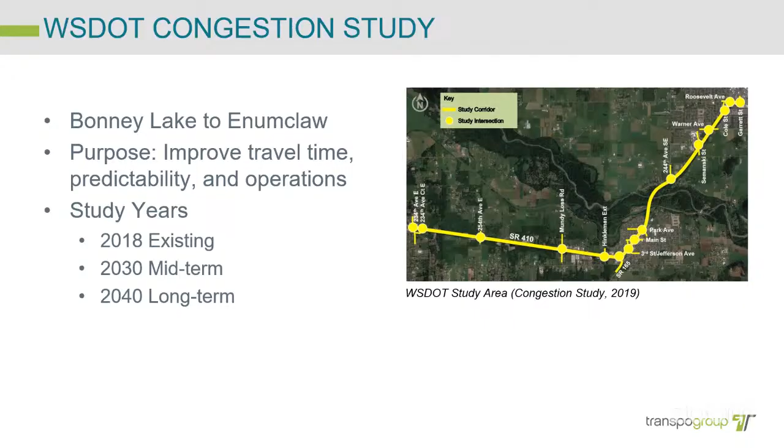And then usually with anything kind of traffic related, we do a 20-year forecast. So they rounded up and did 2040 for the long-term forecast. And then they also had a 2030 that they called a midterm forecast. Let's go to the next slide.

So jumping ahead to what their conclusions from that study was, and they called these midterm strategies. So they said by 2030, this is what the corridor is going to need for improvements. And they considered it basically like priority, like the first thing that they would do.

WSDOT recommended first that Park Avenue would be converted from a signal to a roundabout. So basically taking that intersection, the one through lane in each direction, and just changing it from a signal to a roundabout. Same thing at Main Street, so kind of a similar kind of idea there. And also install a roundabout up at the 244th intersection, which is just north of the river. That's kind of the merge point north of the river getting down. So those were kind of the primary strategies.

Next slide is other kind of things that they mentioned in the study. So they said... Quick question. Go ahead, quick question.

What does restrict access at 244th Avenue Southeast mean? I'm not sure if my colleagues know what that is, but I am very familiar with it.

So when they say restrict access, it's actually at 241st. That little blue dot on the screen is the 241st intersection. Right now you have full access through there, turn left, right, through and all that. Because of the congestion and queuing, they recommended limiting that to right in, right out, so they'd probably put some type of median barrier in that location. So people coming from the side streets wouldn't be able to make left turns in or out of that intersection. If they wanted to make any lefts in and out, they'd have to go up to 244th or other intersections to make those movements.

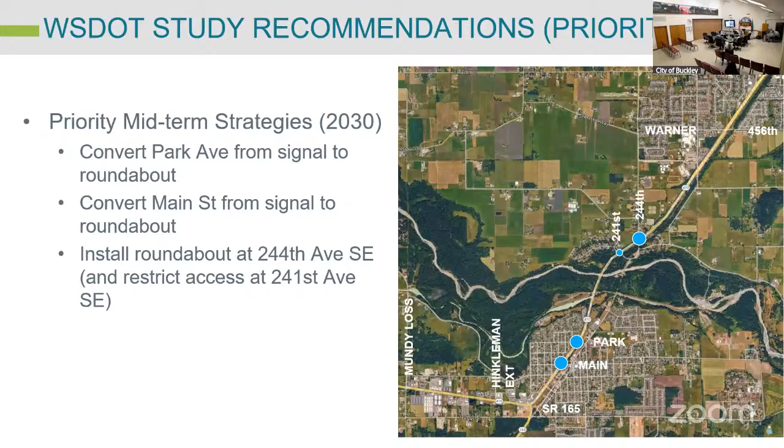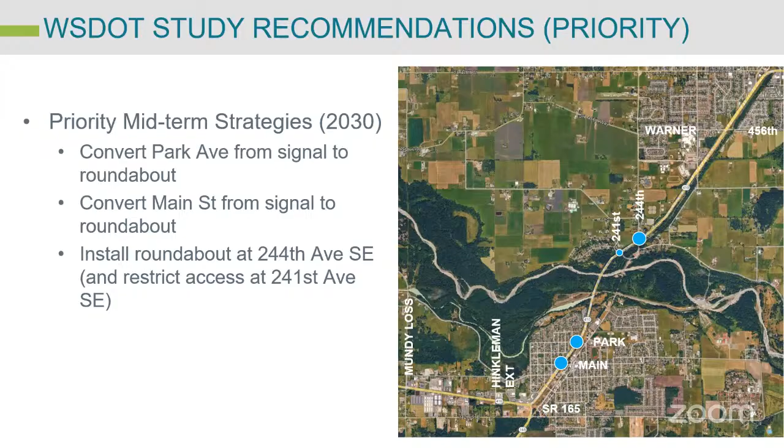On state highways, the intent is to move traffic, and sometimes WashDOT recommends limiting access for mobility's sake. We'll leave it at that because we didn't really get into the restriction of that access in our study. Let's move on and talk about the next thing.

So other midterm strategies - again this would be midterm. For the SR 165 intersection, they said to extend that westbound or southbound left turn lane as you're coming down from Main Street, extending that center left turn lane, or converting that one to a roundabout. They also recommend roundabouts at Mundy Loss and Semanski Street.

Some long-term options - now we're talking closer to 2040. That 20-year forecast suggests you might as well be thinking about doing 2 lanes in each direction, so a 4-lane corridor or a 5-lane corridor, meaning 2 lanes in each direction with a center turn lane. That was the long-term, 20-year forecast. The conclusion from that study was yes, we need a widening of the White River Bridge, but it would not be needed until after 2040 sometime. That's kind of how it was left for the White River Bridge.

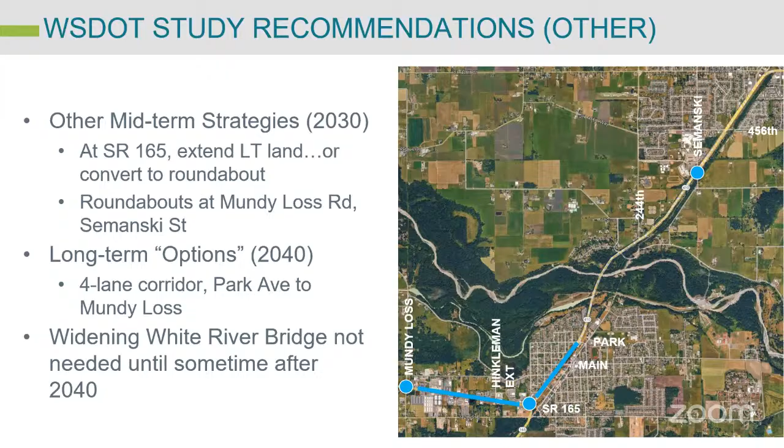So those are the study recommendations from that particular study. There were a lot of questions still about those priority recommendations about roundabouts at Park and Main and some other things. So if we go to the next slide, we talk about the purpose of this updated analysis. At the time they did a high-level analysis saying, yeah, let's do roundabouts there, it should work. This particular analysis is meant to dive in deeper.

So there's more detailed analysis of those strategies, particularly converting Park and Main to roundabouts. We wanted to use a micro simulation of the corridor because we know there's that queuing across the bridge - westbound or southbound traffic coming from King County, Pierce County. We wanted to do a micro simulation to see exactly what would be happening and be able to show that to you guys.

We wanted to update the analysis with 2025 traffic information - we got new counts, so instead of using 2018 data, we got 2025 data. And we also wanted to ask, what if we left it at a traffic signal instead of roundabouts at Park and Main? That was the purpose of the study - to do that deeper dive and some alternative analysis. Next slide.

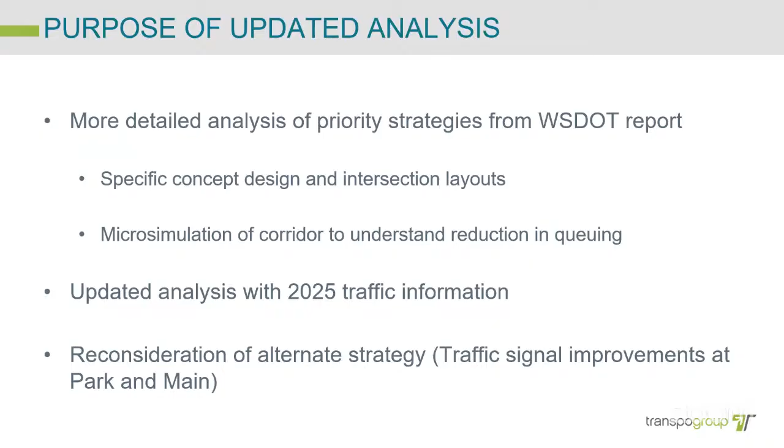So wanted to talk a little bit about existing traffic just to understand what's going on in the corridor. What you're seeing on the screen are graphs showing traffic volumes at 3 different locations along SR 410. The top graph is westbound or southbound traffic, and the bottom is eastbound or northbound traffic, at 3 locations: Warner Avenue, which is closer to Enumclaw, Park Avenue, and Mundy Loss on the west side of town.

The biggest highlight is that lighter blue line on the top graph, highlighted in yellow, which is the PM peak hour. Typically a peak period looks like a mountain peak, going up to a point and coming back down. Whenever you see it flattening out like that, it means there's a capacity constraint in the corridor. That capacity constraint is Park Avenue. There's not enough capacity to pump all the traffic that wants to get through Park in the westbound or southbound direction, so that's why you see that flat line. That's what a traffic engineer looks for.

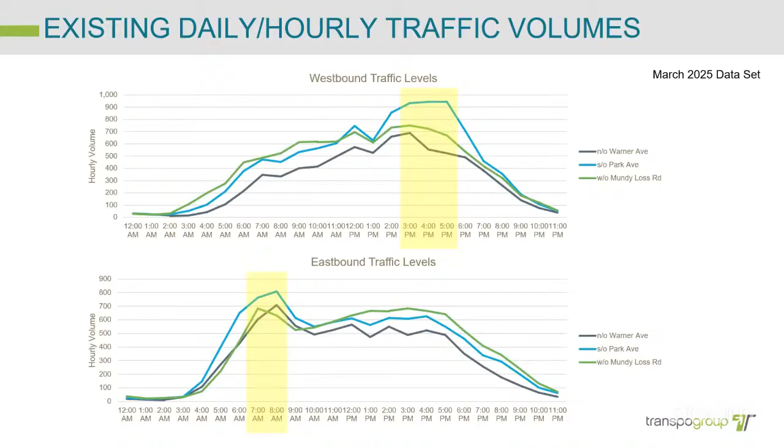Again, this is from March 2025, just for reference. Next slide.

From a daily perspective, there are also rules of thumb about how much traffic can go on a 3-lane corridor through an urban area, and this confirms there's a lot of demand for Park Avenue—we're already at that rule of thumb capacity constraint. A 3-lane road, one lane in each direction with some separate turn lanes, is already at the daily traffic volume where some places recommend widening to add more capacity.

Also for reference, on the right is vehicle classification. 90% of the traffic on this corridor over the course of the day is your typical single-unit cars, and the remaining 10-11% is single-unit trucks, buses, or multi-unit semi trucks. So about 10-11% is bigger vehicles, and 90% is your typical auto vehicle.

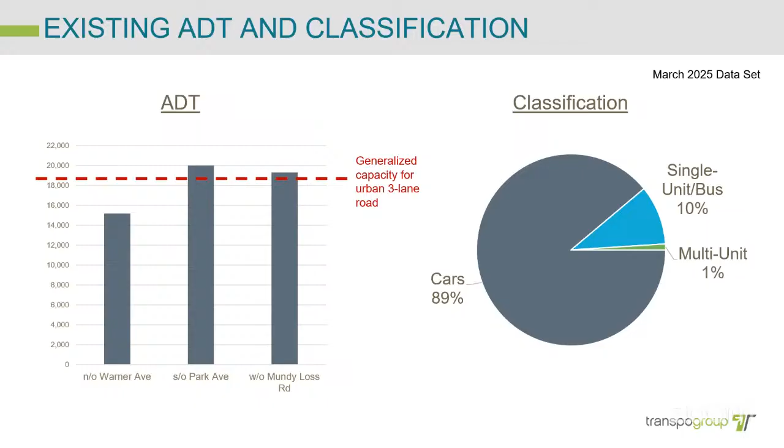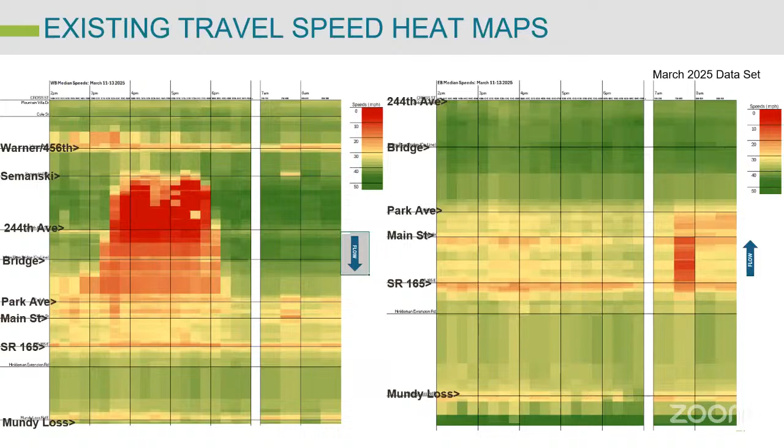All right, let's go to the next slide. So in our study, we focused on the PM peak hour, and the blue dots you see on the right are the intersections where we got traffic counts and other data. We also got travel time data from that big data source, so we could get a really good solid average travel time through the corridor. That's what we were trying to calibrate the model to: the queuing, the traffic volumes, and the travel times.

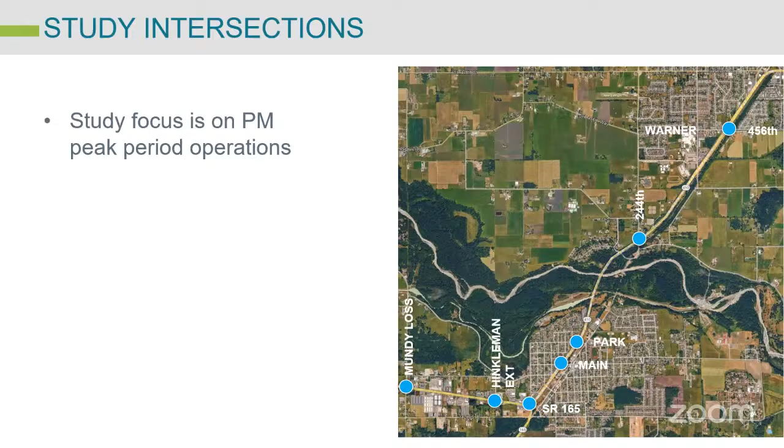Next slide. So the other thing we needed to do is come up with a 20-year forecast. We did look at a variety of sources. The short story here is the PSRC model has some more recent data than the previous study, the WSDOT study, but it showed a much lower growth rate. We preferred to try to be closer to what the previous study assumed. The previous WSDOT corridor study assumed between a 1% and 2% annual growth rate for the 20 years. We assumed very similar for our analysis.

So we took the 2025 volumes and grew them by these same annual growth percentages to kind of mimic the same thing. More conservative, meaning higher, so that it will show a little bit more impacts in the future. But one of the main purposes was to kind of ground truth what was coming out of the WSDOT study, so we wanted to be similar with their growth rates. All right, next slide.

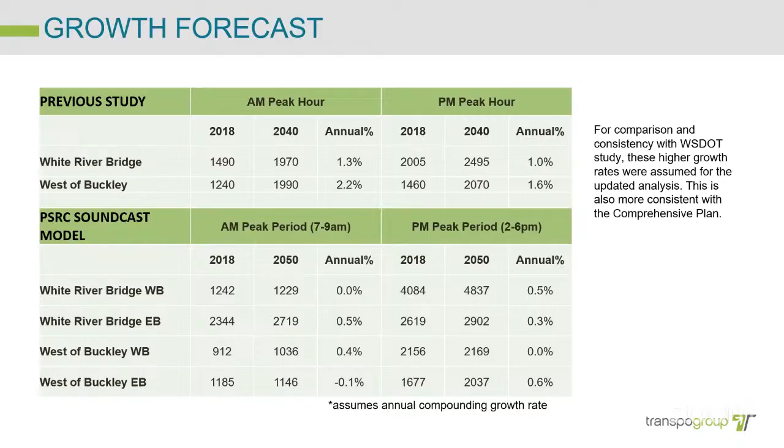So this is just documenting the existing and future turning movements at the intersection. The way you look at this spreadsheet diagram is you can see the turning movements, the left turns, the throughs, and the rights at these two intersections. The number in the very center of each square is the total entering traffic. For instance, at Park, in the PM peak hour, there's 2285 vehicles moving through that intersection. In the future, that bumps up to 2720.

Southbound, coming from the bridge, you get 1295 as the total volume coming into this intersection, and that grows to close to almost 1500. So it's quite a bit of volume in existing conditions, and it just gets even higher in the future.

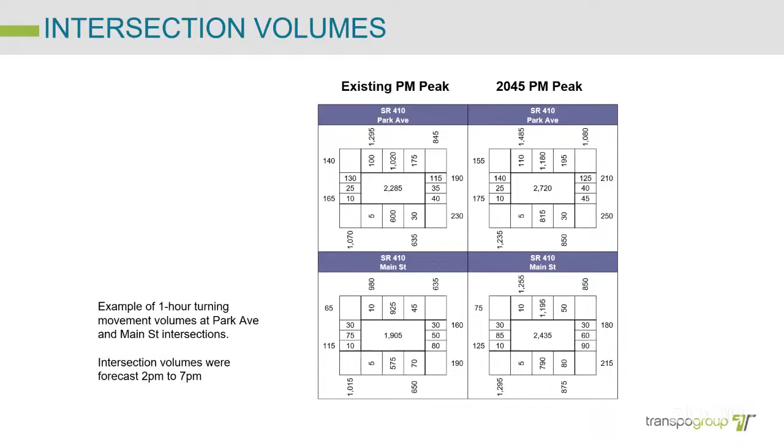So the microsimulation scenarios, we basically looked at 3 different scenarios. We looked at the existing, because with any type of modeling, we have to calibrate it to the existing conditions, make sure that the existing model is predicting existing conditions pretty well. And then we will put in the new inputs, the volumes, to test the future scenarios.

So we have an existing calibration scenario, and then we have the 2 action scenarios. We didn't do a no action, because the existing was pretty bad already. We already know that no action would be even worse. But we do have the 2 future scenarios. One is the action - we're calling it, quote unquote, the action, because that is what was recommended in the WSDOT study.

That is roundabouts. So in the action scenario, we would convert Park Avenue and Main Street to single lane roundabouts, because that's what was assumed in the study - one circulating lane at the roundabout. We did also assume a minor modification at the 165 signal, but for the most part, that signal would operate very similar. It's just an added northbound right coming from the 165 leg, basically the leg that has McDonald's on it - there'd be an extra northbound right turn lane. And then we also added as much capacity as possible to the 244th intersection to try to not make that a pinch point, to allow more volume from King County.

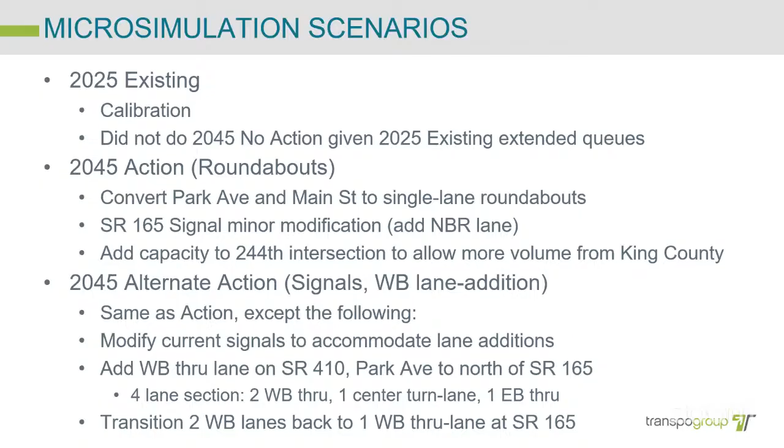So next slide kind of shows a diagram of what we're trying to get at there - diagrams for the different scenarios.

Next slide talks about the signals, how the signals would work. So like we talked about previously, we would expand the southbound side of the intersection. So you're coming, say like you're coming from King County and coming down, instead of just having 1 through lane, you would have 2 through lanes through the intersection. And so you would widen just on that left side of the screen of that corridor.

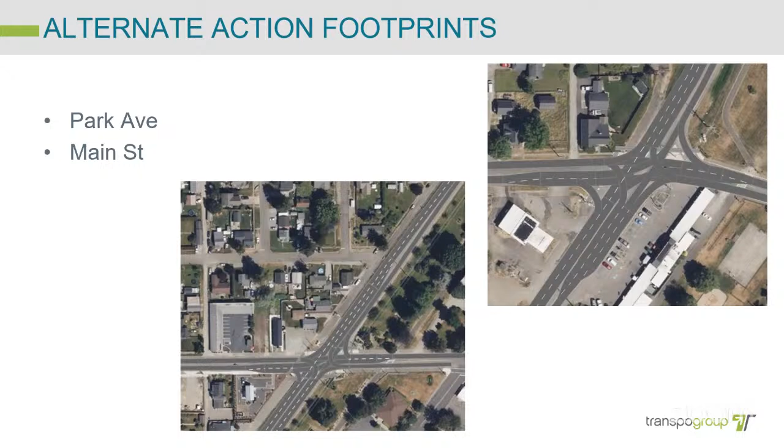This graphic is just trying to explain that you're going to have 2 through lanes, but we would transition back down to 1 lane once you got down to the SR 165 intersection. So the alternatives are basically assuming the SR 165 intersection is largely unchanged from existing. There might be a few tweaks with a separate turn lane, but largely it would not be expanded beyond what it already is. It would still be a signal. Both alternatives assume that same condition.

Brief note on the calibration. WSDOT has standards that say when you meet certain criteria, it means the micro simulation was calibrated. We met all those tolerances, so we checked that box. We did have some fun time at the 244th intersection, because there's just a lot going on there when it comes to driver behavior—with the queuing across the bridge, there was some unique driver behavior. I'll just leave it at that.

These go back to those action heat maps. What we did on the left is basically what our model was predicting. We calibrated it, and it showed a little bit more delays between Park Avenue and 244th. What you're seeing is that in existing conditions between Park Avenue and 244th, there's this rolling queue—not completely stop and go, but kind of a rolling queue across the bridge up to 244th. Once you get up to 244th, it's definitely stop and go. That's the pinch point for existing conditions.

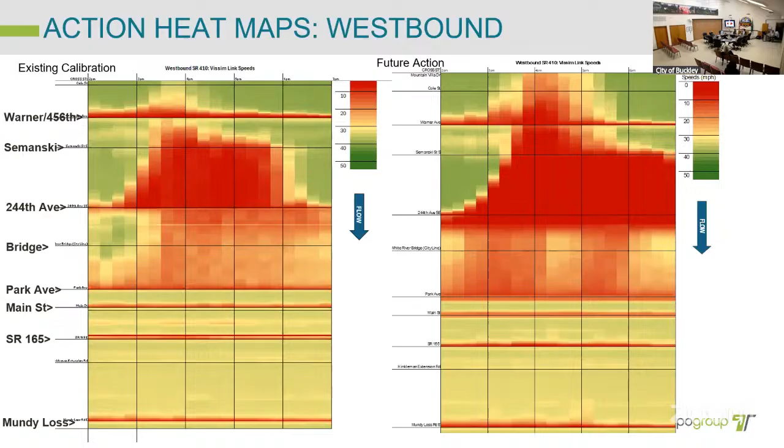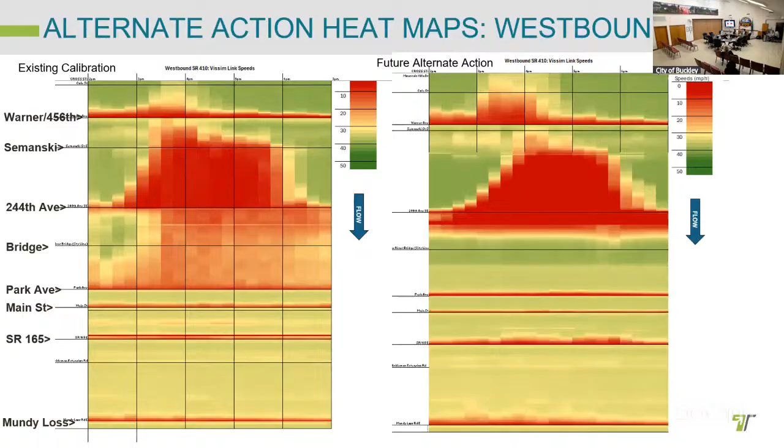Correct. Basically what this is saying is the demand is high enough that you really need the 2 lanes through the Park intersection—those 2 westbound, southbound lanes, whatever you call them. That really opens up the capacity. So then really the bridge becomes the issue, because that merging down to 1 lane is what's causing that big red mountain. But once you get down to Park, if you have 2 southbound lanes, 2 westbound lanes, that opens up that capacity, and you don't get any more red there.

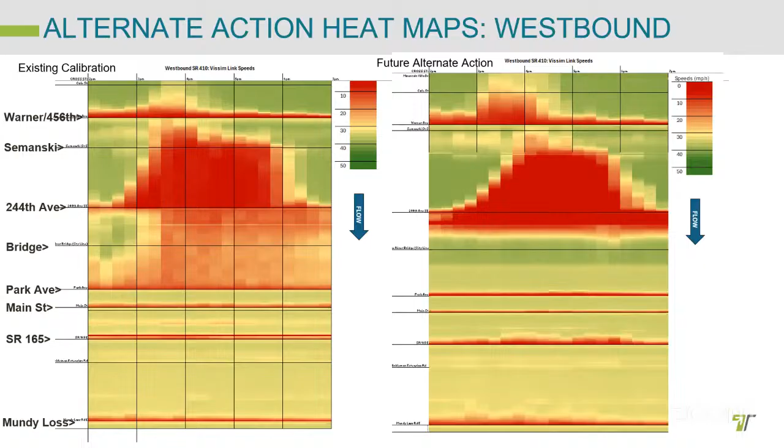Okay, now we'll move on to the next part.

So these next two slides are the same idea, but in the opposite direction, northbound or eastbound. The left side is existing, the right side is the roundabout. You do see some additional delays with the roundabout, but everything is generally not too bad. It calms down once it gets to the intersection and doesn't spill too far back.

At the very top is really 244th. You'll notice there's congestion up to that point, and there might be capacity issues northbound left because there's a lot going on up there. But if you just focus on the city itself, generally the roundabouts are working okay.

Moving to the next slide, again it's compare and contrast. When you're looking just at the Park and Buckley side, it's very similar to the previous slide. The big smear up there is due to issues with the 244th intersection north of the river, and that's actually spilling back down to Park Avenue in the reverse direction for a variety of reasons. But assuming there are improvements up there, that smear would go away.

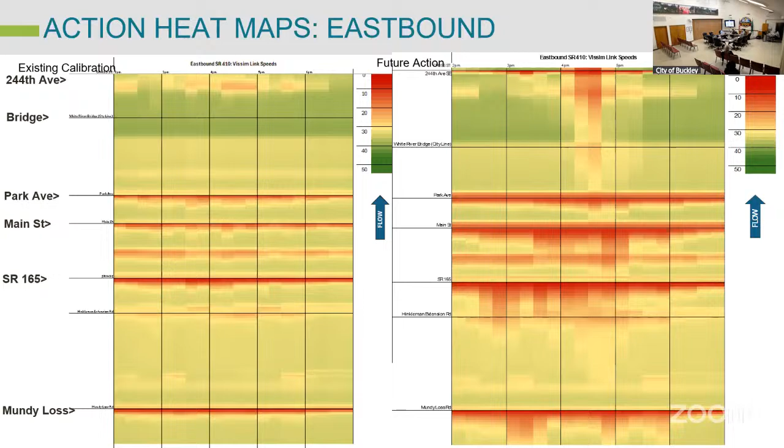And again, I'd just note that in the northbound direction, in terms of Park and Buckley, the difference between the action and the alternate action isn't much in Buckley. What happens more is north of the bridge, where there are some issues that have to do with their problem over there and how they might fix it.

So now we're going to show some simulation videos just to show the analysis that we did. Dom's going to bring that up. There are three different videos: one's the existing, one's the action, and one's the alternate action. So basically you've got the signal, and then the roundabouts and the signals.

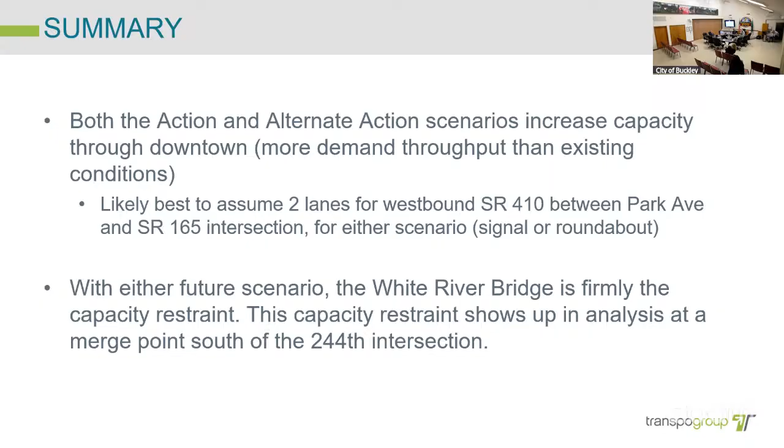But that's those of us that can think for ourselves. But yes, I appreciate the analysis of the red, of what that's going to look like, but WSDOT's going to dictate it. Councilmember Green, I apologize.

Oh no, no problem. So with the conclusions here, like with the 2 lanes being built out or the roundabouts, either way alleviating some of that red, 2 lanes looks better for sure. Does that also assume that roundabouts are being put in on the other side of the bridge? Is that correct, or what happens over there to make this happen?

So what we assumed is we put a signal, just because it's a little bit simpler to model. We assumed a signal at the 244th intersection. But even then, that wasn't doing too hot, because it still had to neck down to 1 lane to get across the bridge. So there was a lot of queues there, limiting the amount. But we did actually assume a signal at 244th in the future.

Last I heard, that was the hot item of the day on the King County side, was adding a light there, which will do absolutely nothing in my lowly explanation. It'll just be like being in Seattle - the light's green, but I can't go because there's traffic over there. So a light there will not produce any positive effect in my eyes.

Well, people are already being their own light. They're stopping, it's backed up, and people are polite and they let somebody coming in off of 244th go onto westbound 410. And it works that way, I don't think I've ever seen a jerk. And then at 10am somebody slams on their brakes to let somebody out of their road too. Well, that's being stupid, we gotta let the stuff flow.

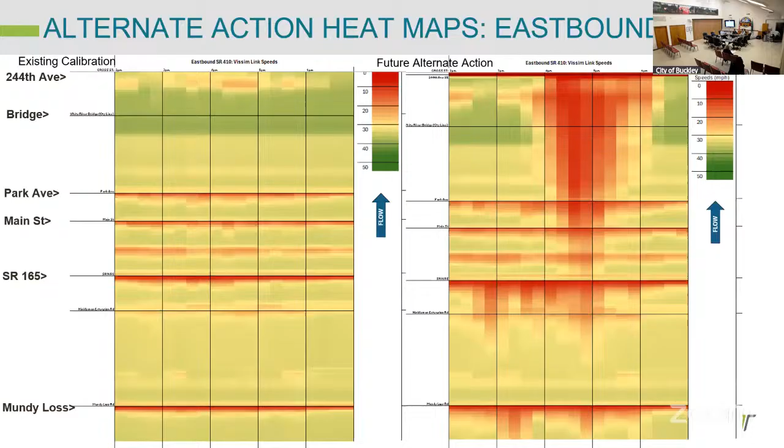They already paid with the last traffic light thing - during her estate, they paid $7,500 to put the vault in that yard. There's no place to put that roundabout there. We're kind of trying to stay away from there, and there's not as much there, but just the imminent right-of-way acquisition, the tearing down of a house...

Like Brent said, this isn't showing sidewalks on the outside. You do have sidewalks on the legs of these roundabouts - you could have flashing beacons, pedestrian connectivity.

So from a standpoint of not sugarcoating things - the traffic modeling says we modify signals, add a lane, it works. We agree, we looked at roundabouts, we looked here, oh, gulp, that's one. Okay, WSDOT, after you get that second bridge, we'll take a hard look at that. But until such time, there really isn't a marked benefit. Now WSDOT talks about life cycle cost, pedestrian safety. Understood, but...

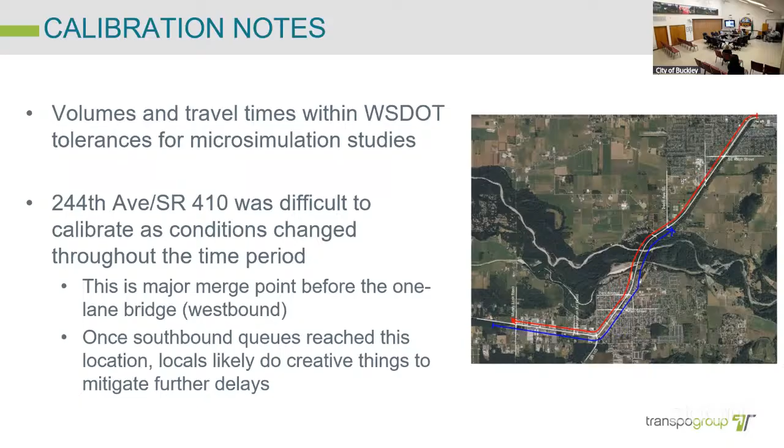Yeah, what you're saying is exactly correct. The reason why they do that is to try to slow people down. So it has to be big enough to slow people down and make the merging work. So when you get that multi-lane roundabout, it does have to be bigger than just a signal thing, because otherwise people will just blow through it. You have to have that kind of deflection, they call it, so they will slow down.